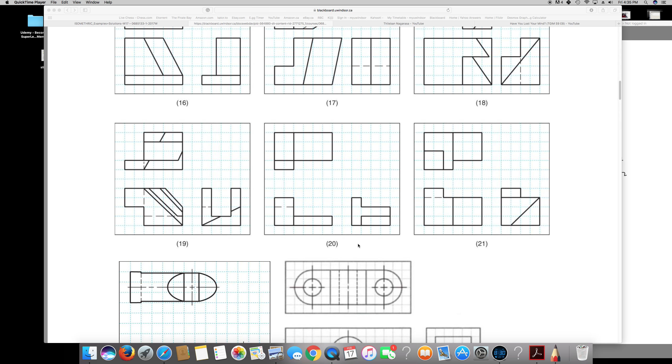Guys, in this video I'm going to show you how to draw isometric views from orthographic views. The three pictures above I have drawn already in previous videos. You can take a look at it, and I'm going to draw this fourth one.

So here we go. Since we have this top, front and right side view, we had to construct a box first. In order to do that, I had to know the bottom distance, the right side distance, and the height. If you see the bottom distance, we have to count all the boxes that cover the bottom and top. Starting from here: 1, 2, 3, 4, 5, 6.

So I have to draw that in a 30-degree angle. It's going to be something like this, 6 boxes long. And if you see the right side, it's 4 boxes long. And if you see the height, it's 1, 2, 3, 4, so 4 boxes long.

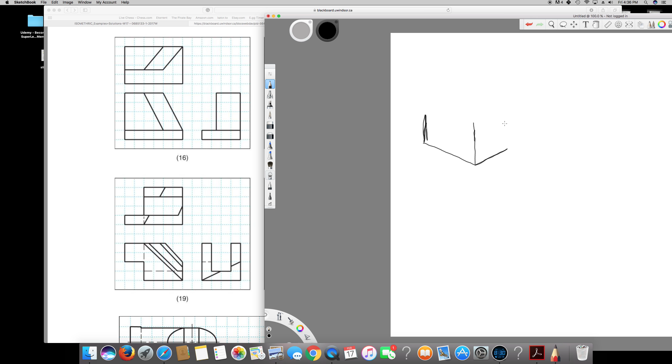So this is the basic thing we have to do. Then we have to form the box. In order to do that, I have to draw everything parallel to each other. Like for this one, every height should be parallel to each other. So this one is parallel, this one is parallel, and the bottom is parallel to the top, and this is parallel, like this. So this is my box.

The reason we draw the box is so we can put whatever item we are going to draw inside the box, so we know it doesn't go outside of the box.

Let's see what's happening here. From this front view, you know that in this part there's nothing you can see from the front side. So it's like this. There's no parts apart from this, so we can separate that one.

And from the top view, you know this is the only part remaining here, there's nothing else around it. So I draw a straight line. This is the only part left, but we have to make sure whether it's this inclined part or a straight part, because even if it's inclined, it looks like a straight line from the right side view, and from the top view it also looks like a straight line, but we can tell some inclined things are here from the front view.

So if you see, there's an inclined thing starting from the second box of the top view. It's starting from the second, and there's one more incline starting from the third, 3.5. Let's draw that one, and this one is going all the way down to the end.

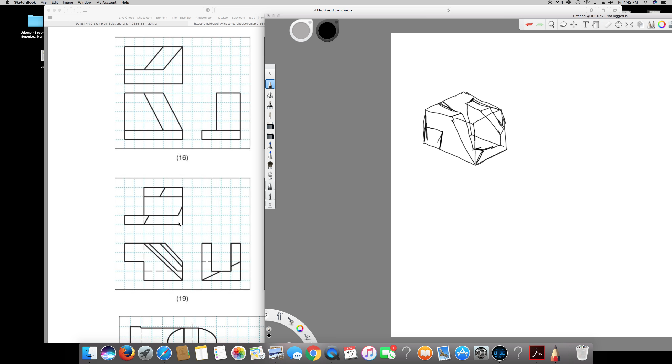And from the front view, let's see, this is right, this is perfect, and everything looks perfect. And from the right side view, this is perfect, and the bottom part is perfect. So we have done it perfectly, and this is my isometric view for this picture.